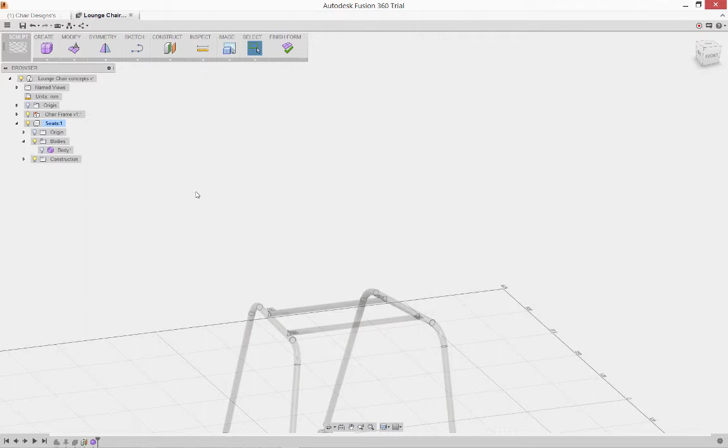Another great way to challenge yourself into really learning Fusion 360's options when it comes to T-splines modeling is to explore the idea of taking a closed primitive, opening it up to create a different type of geometry. A quad ball is a very flexible primitive.

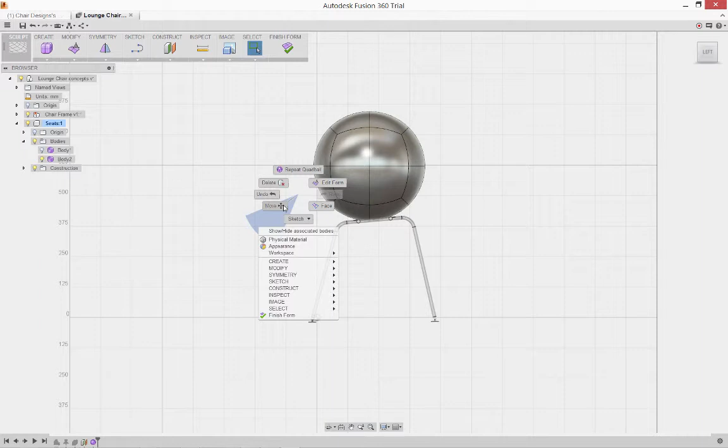In this case, what I want to do is just rough one into place, rotate it a little bit, and then remove half of the quad ball to create a dish.

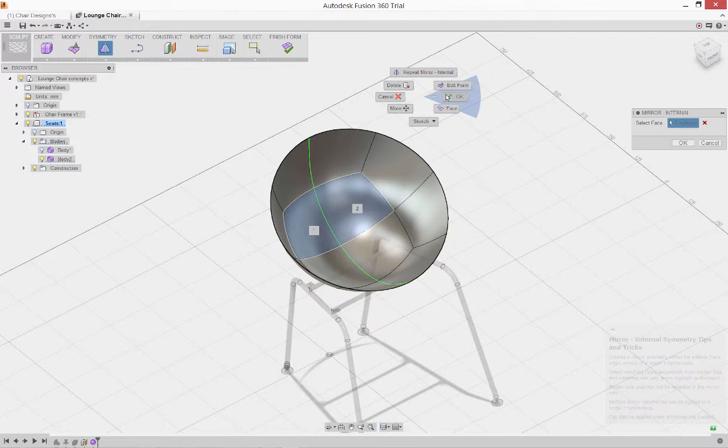Now that I have my model opened up, I'm going to go ahead and use Edit Form and other tools along with Symmetry to make modifications to this to create a classic style lounge seat.

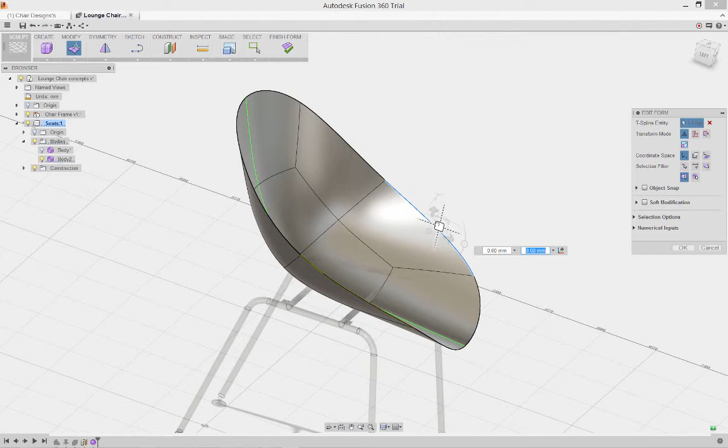By using basic push and pull and rotate tools, the same as we've been using all along, you can see how this quad ball is transformed into something radically different in no time at all. For the sake of time, I'm going to speed up this process so you can see the various steps taken in far less time than they took.

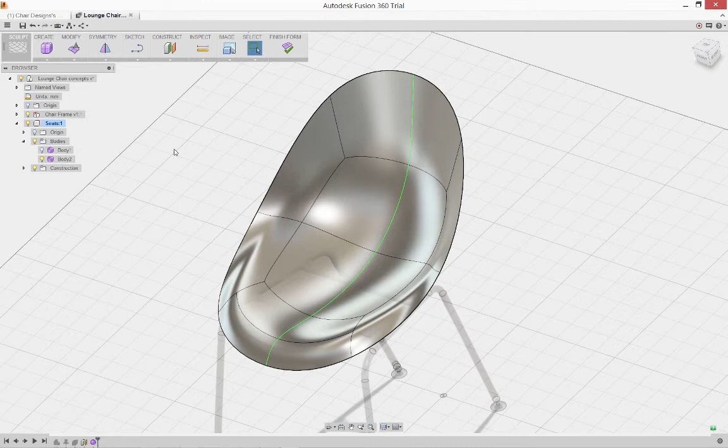Once I have my open T-spline form and shape, I can use the Thicken tool to give it depth. In this case, I'll make it 5 millimeters thick, but I want to tell it to go ahead and apply a soft edge all the way around the perimeter.

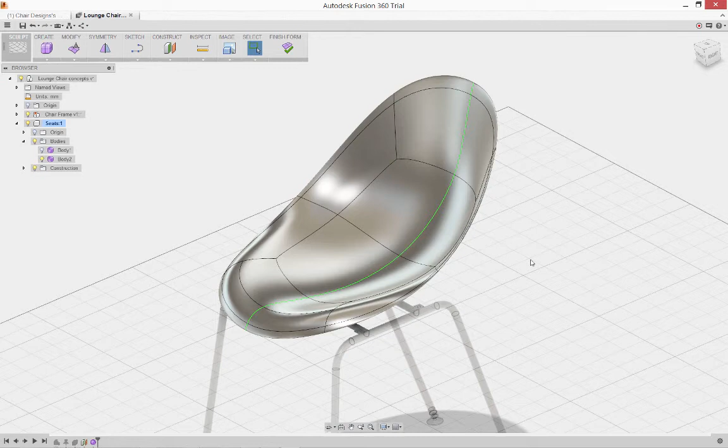This has essentially made a solid model, or at least a model that will be converted to a solid when I select Finish Form and re-enter the modeling environment. Once I do that, you'll see that other bodies reappear.

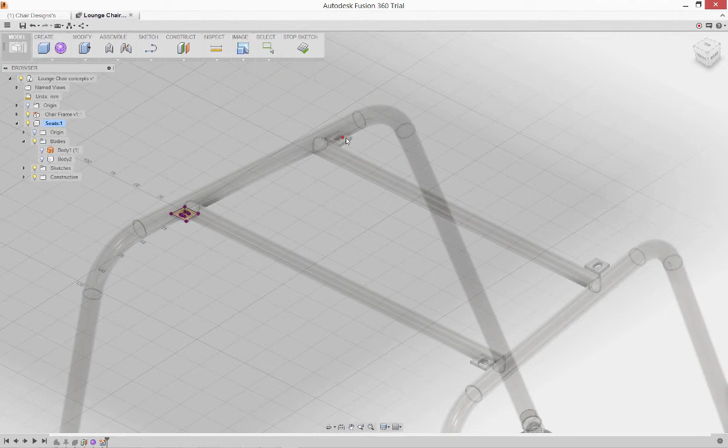Now what I need to do is complete a design for mounting my new solid chair to the purchased frame. To do this, I'll simply start a new sketch and project the edges of my mounting pads from the purchased frame.

Once that's done, I can go ahead and connect those into any sort of web structure or anything else that I think needs to be in place to make it strong enough to make sure my chair remains safely attached to the base.

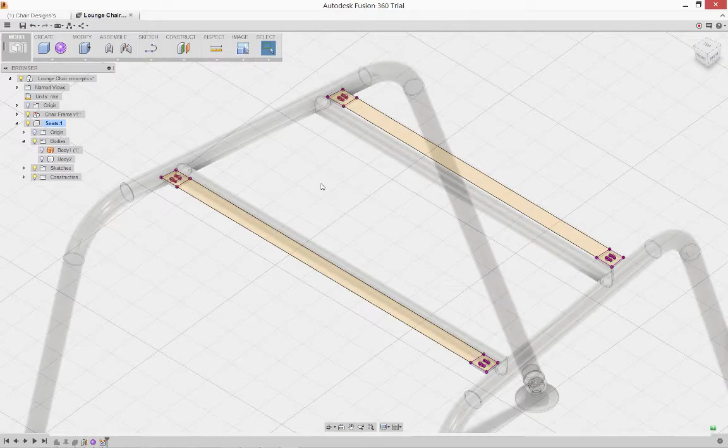The flexibility of Fusion 360 allows me to go ahead and finish my sketch and begin to extrude these profiles while my seat is still off. Now if I were just making a standalone body of this, this would be all I would need.

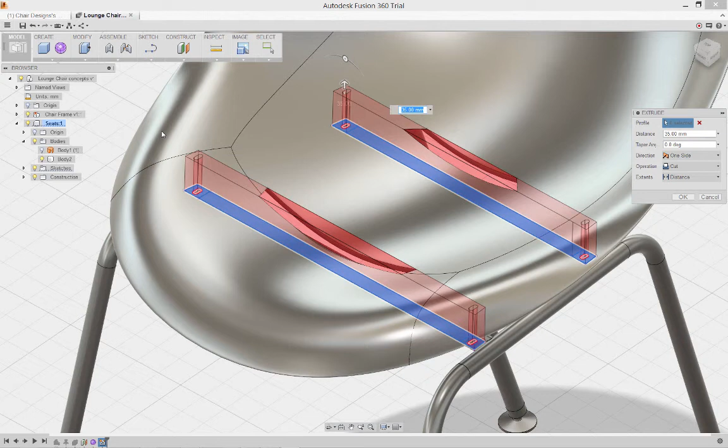I can turn my seat on, see that it's cutting into my seat, but then tell it to go ahead and join, and tell it to join in the best way it possibly can by saying extrude all. You'll see it meets the geometry of my existing seat and stops.

I can apply some fillets to make this a better connection and to look better as well, and then smooth the transition between the base and the bottom of the seat.

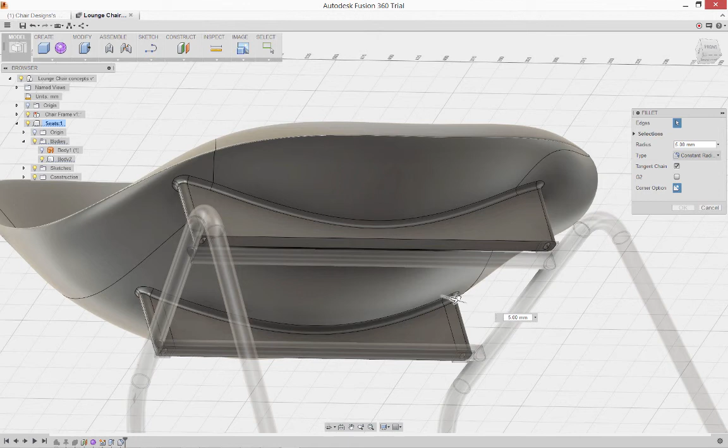Just for the appearance sake, let's go ahead and apply a little different look.

Now I need to export this geometry to a format that I can produce it in. I can export to any standard neutral CAD format, or some CAD formats that are specific to other manufacturers.

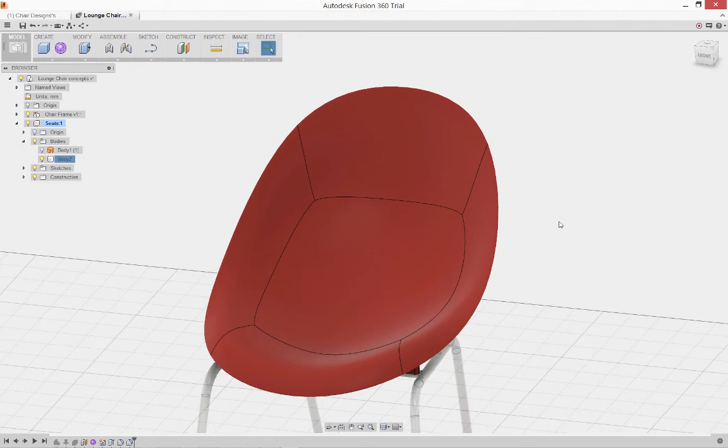I can export also directly to Autodesk Inventor, and I can also tell my body to go out to a stereolithography file, an STL file.

I'm able to preview the mesh. I'm able to use preset refinement levels to judge how smooth I need the STL file to be.

And I can also use custom settings. For example, surface deviation to tell it how flat the face can be away from the curve.

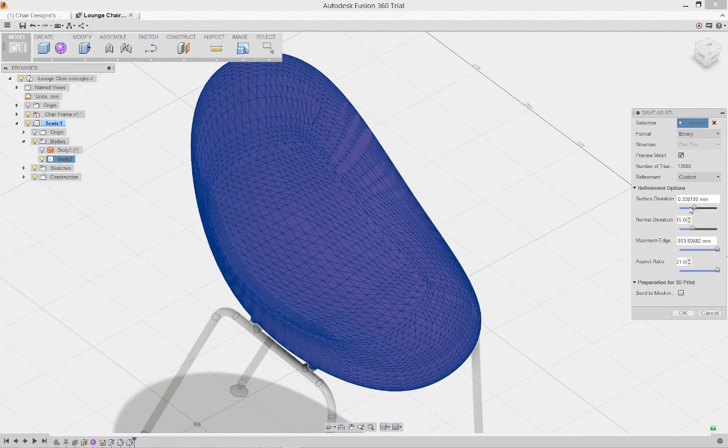I can export out my STL file and produce it in virtually any 3D printer made.